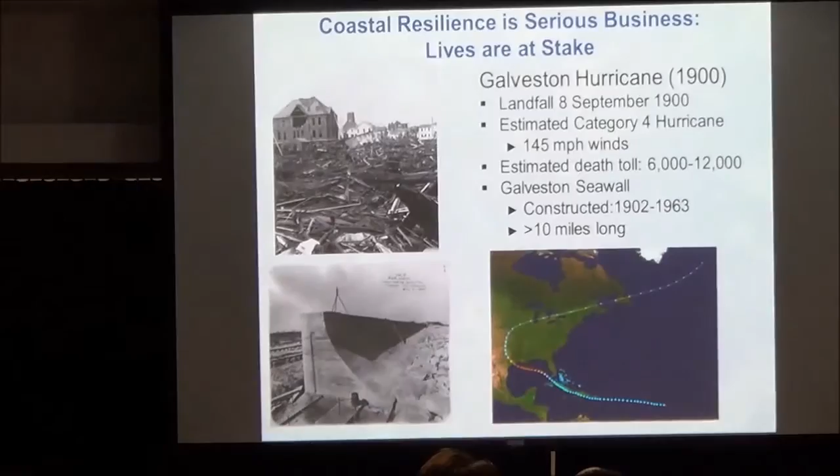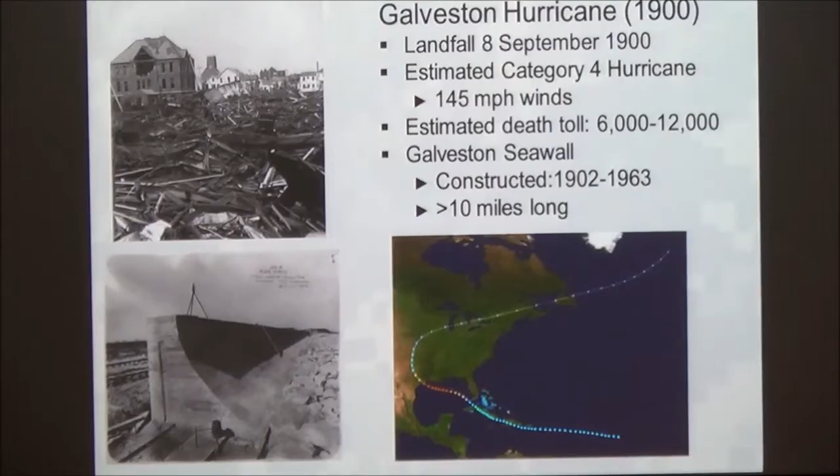I'm also a fan of history, and I'm going to use several examples that maybe don't particularly resonate so much with the Great Lakes setting, but hopefully we'll be able to draw some connections to analogs that do resonate with you. I was using this particular example recently in a series of talks. I was in Australia and New Zealand last month speaking on these exact topics on the other side of the globe. The deadliest natural disaster in U.S. history was the hurricane of 1900, which devastated Galveston Island.

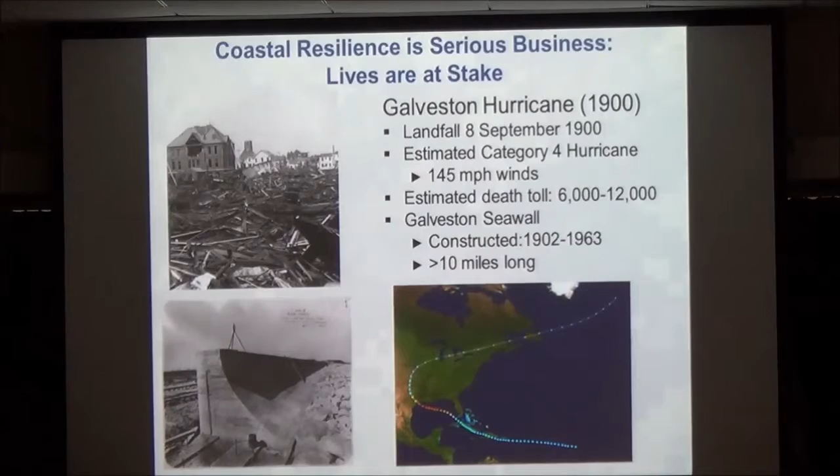The city of Galveston, in fact, at the time was one of 3 population centers in the state of Texas. It was equivalent in size, about 40,000 people roughly, to the city of Houston and the city of Dallas. They were all the same size. And arguably, Galveston was in fact a commercial center of the state of Texas because of the port. The port in Galveston dwarfed what existed in Houston at the time, in 1900. The surge was around 15 feet, it's estimated. The highest natural elevation on Galveston Island at the time, about 9 feet.

The best estimate for the number of deaths is 8,000 people died that day and the days following. So many dead, in fact, that a traditional burial was impossible, so funeral pyres burned on Galveston Island for weeks, day and night, as neighbors and family members burned their relations and friends after the event. That'll make an impression on a community.

And so after that event, a panel was commissioned. It was actually chaired by a former chief of engineers, Brigadier General Robert. And they came up with the Robert Plan, which included the construction of the Galveston seawall. At ASCE, it's on the Historic Registry of Engineered Features. If you've ever been there, it's quite an impressive structure. This 15 feet tall concrete structure. They built, in fact, the first 3 miles of this structure within just a couple of years' time. But then over about 60 years, constructed what now is in excess of 10 miles of seawall by this same design.

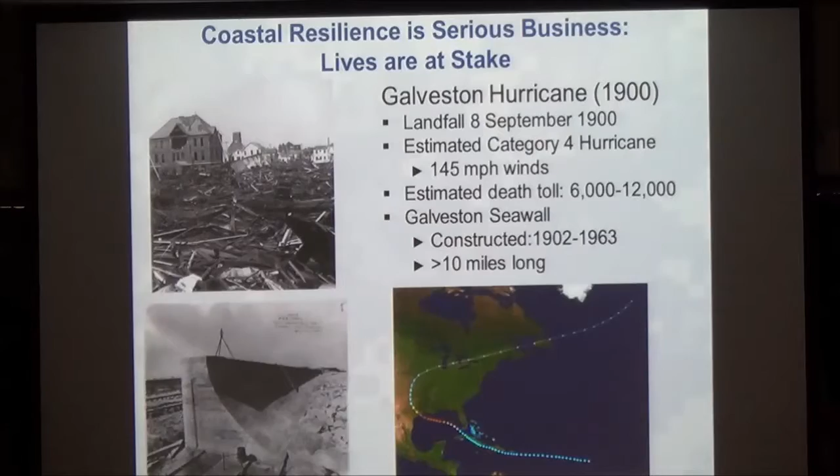So you build a structure like that seawall, and what do you do? You develop right behind it, right? So that hotel sits exactly 100 yards from the seawall itself. That particular hotel was constructed for the whopping sum of $1 million, which was a lot of money at that time. It's a very impressive place.

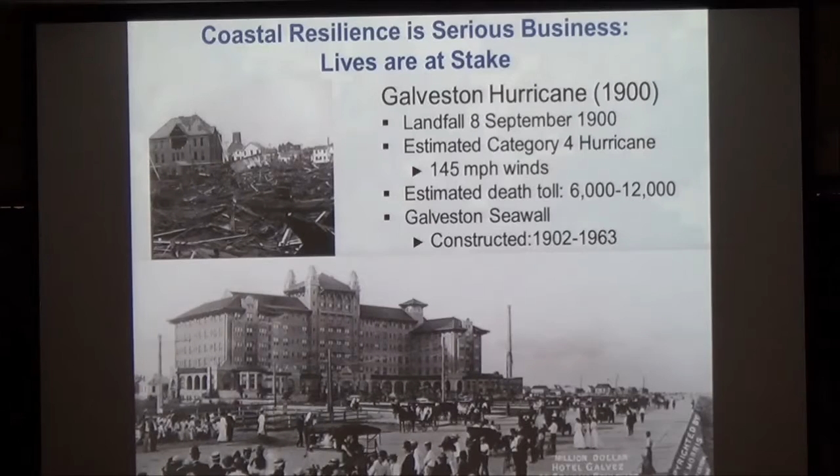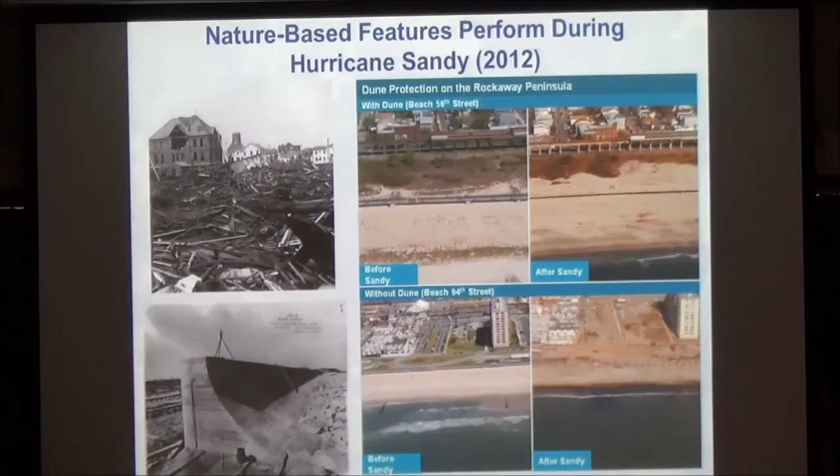Hurricane Sandy work that was mentioned. The North Atlantic Coast Comprehensive Study, what we call the NACCS affectionately, was a $20 million study the Corps was directed by Congress to conduct to evaluate opportunities to reduce coastal risk and enhance coastal resilience following Hurricane Sandy. The final report of the study was issued in January of this year.

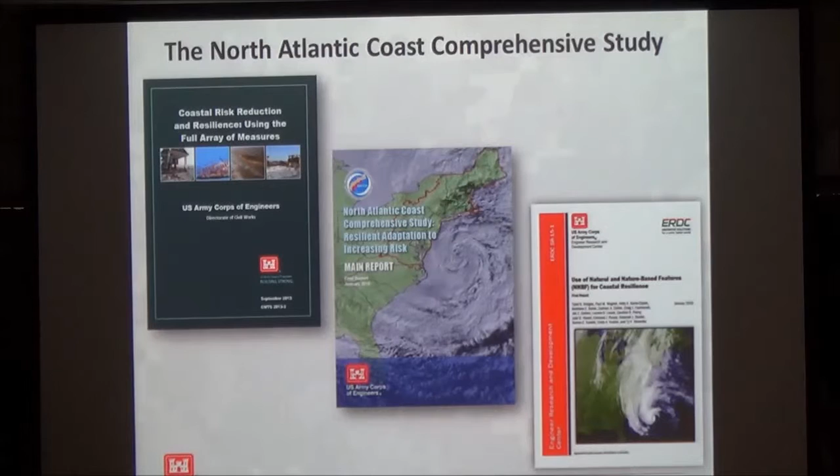There are some people who want to pit one against the other. I'm not sure that's such a useful way to proceed in discussion about this, but more how to integrate. I think the discussion this morning has been along those lines, right? How to integrate conventional infrastructure where it's needed with natural or nature-based approaches.

These are the kinds of features that are highlighted in these documents I've just shown you, including what was previously mentioned, very important: beach dune complexes are very important and underappreciated. We, in fact, at ERDC and USACE and USGS partnered with ASBPA just last week in a workshop out at Kitty Hawk, North Carolina, specifically focused on dunes.

Dune engineering, dune construction. Dunes, I think, are highly underappreciated in the United States for the value they provide, not just from an engineering perspective, but for the environmental and ecosystem values that dunes provide. And it's deserving of much more emphasis, and hopefully we'll build momentum from last week's workshop, which was originally designed for 50 people and went above 100 because of the interest.

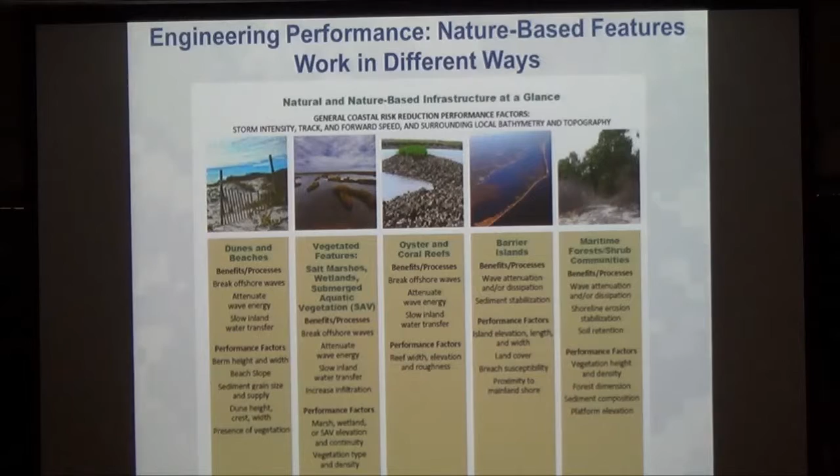But I think we all get the kinds of features. I will include, because it's been referenced already this morning, the importance of forests. Larger plants than the grasses that we might typically associate with these kinds of features. A forest can divert more surge and attenuate more waves than a typical grass species is going to. And there may be some places, certainly on the marine coast, where that's important and applicable.

This is just an excerpt from this document that gets to our statement of this integrated approach. There are going to be differences as to how much emphasis or weight can be placed on natural and nature-based versus conventional infrastructure. It's going to vary by context, of course, but our emphasis is on the integration, not the either-or.

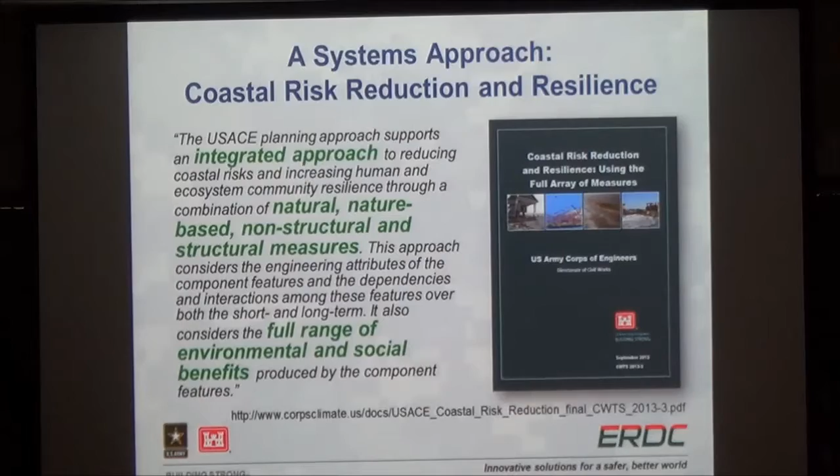And this is in the context of another word that's been used several times, I think, already this morning, this idea of resilience, which I guess is the buzzword du jour for the last few years. But I think there is real meaning there. It's not just a buzzword thing. But if you look at the literature, there are literally hundreds of definitions of resilience. They use it in electrical infrastructure. It's used everywhere. In ecology, certainly as well.

And we've been doing work within the Corps of Engineers to kind of define this meaning in some tangible form that's applicable to the things that we're doing. I don't want to go into this diagram too much, just to make a point that's already been emphasized through many of the examples, that the systems we're working with are dynamic.

And though we want to pursue concepts and intentions that we use words like stabilize, these are dynamic systems. And so the approaches I think that we need to use more and think about more is how we can build infrastructure, natural infrastructure, that is more harmonious, if you will, with the dynamism that's characteristic of this land-water interface that we're concerned with here.

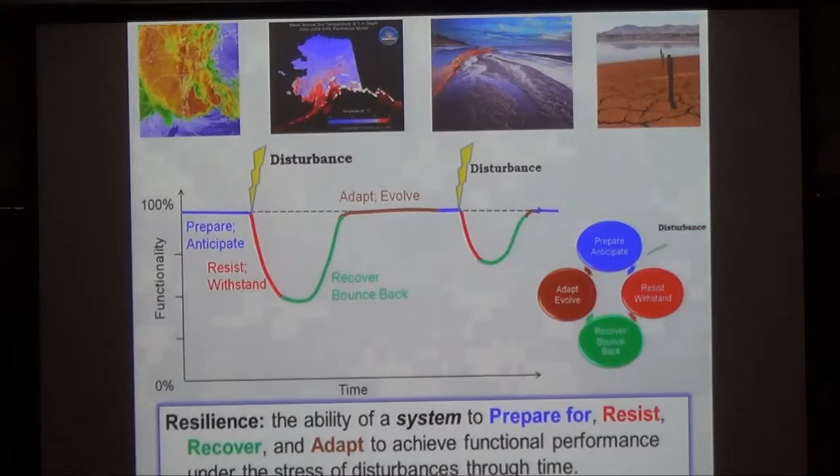So in this context of coastal resilience, this barrier island, the country in the world that has the most barrier islands, anybody want to hazard a guess? The United States of America. I know it's maybe not so applicable to the Great Lakes, but I think by last count we have 405 barrier islands in the United States, by far more than any other country on the planet.

But how do we use these kind of integrated approaches to produce better alignment, reduce risks? What range of services, including ecosystem services, is that a useful frame for us? I think it is, for considering how to pursue these kinds of opportunities. And then importantly, what are the science and engineering needs, gaps that need to be filled or addressed in some fashion with guidance to be able to promote these kinds of approaches?

These kind of figures are quite boring, but it was a useful device for us in developing the natural and nature-based features report that we produced for Sandy, to develop a framework of how to think about these opportunities. And in fact, many of the organizations that we solicited feedback from, including folks in the NGO community and sister agencies and government, gave us a lot of positive feedback on just helping to frame the thought process of how you identify, evaluate, and then pursue through transition implementation of these options.

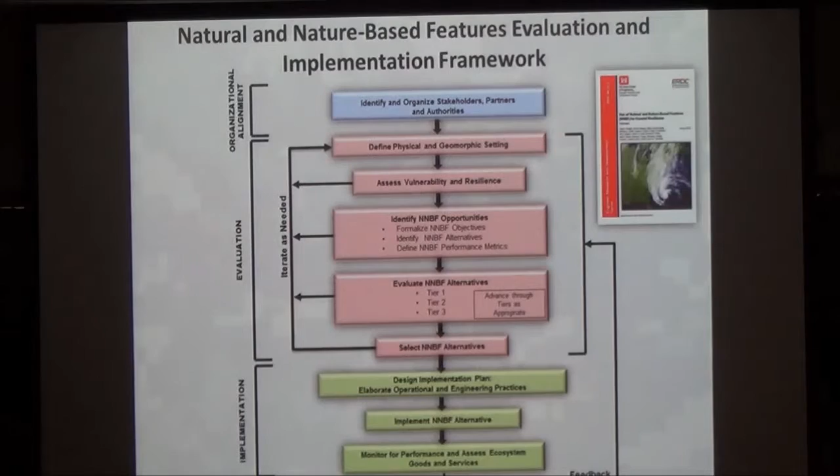So one source of advice I would give in context here is don't cut past this somewhat boring step, because it's useful in organizing your energies and putting them where it needs to be.

And I think now is a very useful time to pursue these kinds of opportunities because there are a lot of stars aligned. A lot of people are paying attention to natural infrastructure, i.e., a 100,000 person corporation called Caterpillar, and they're not the only ones thinking about this.

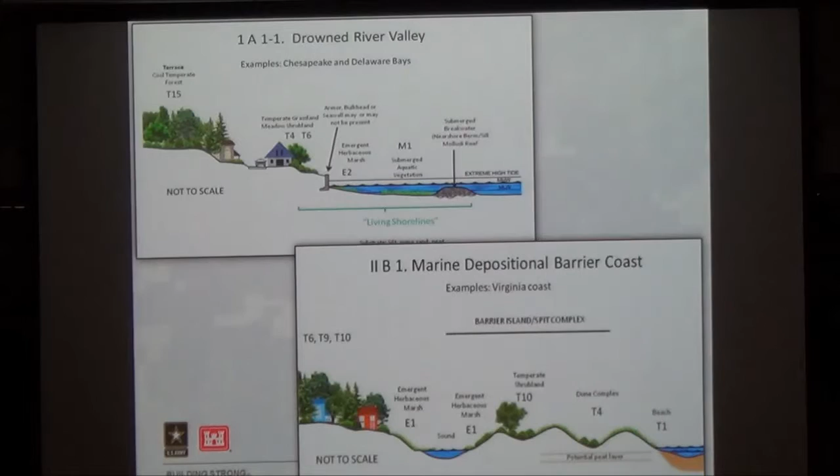This point has already been made, so I won't spend much time here, but we spend a lot of time talking about different physical contexts. Geomorphology matters, and what is going to work in one context is not necessarily going to work in another context. So definitely there's no one-size-fits-all silver bullet, pick your metaphor, for these kinds of approaches. And it has to be based, as was emphasized this morning, on the right processes, and processes that will support and sustain the solution over time.

We did spend some time thinking about how you'd go about evaluating from an engineering perspective these integrated approaches, and this slide just makes two simple points, that we envision needing a kind of a tiered approach for these kinds of evaluations.

If you've got to deploy the supercomputer every time you want to put one of these kinds of projects in place, you're not going to construct many projects, right? So thinking about how to do this in a tiered fashion that will facilitate the planning and the permitting and the engineering design, I think is a useful thing to think about as you move forward with guidance or a

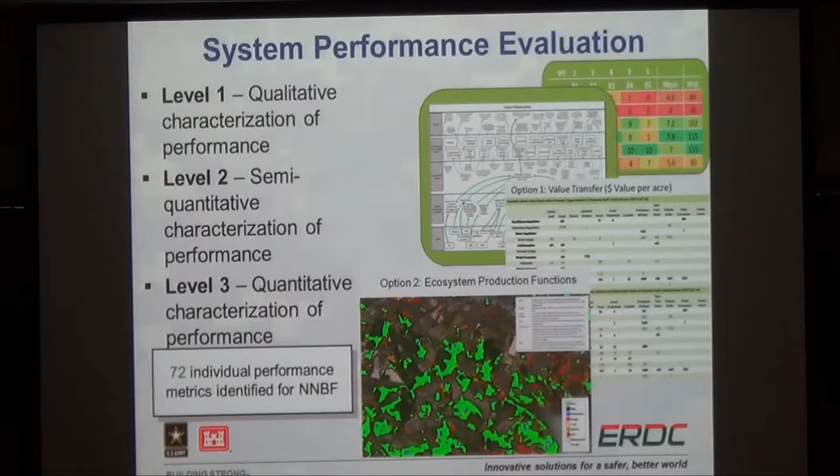plan of attack. I also mentioned that we took in our report an ecosystem services-based concept for how to evaluate the performance of these systems. We, as was I think articulated several times this morning, have multiple objectives we're trying to achieve with these kinds of approaches, right? Engineering performance is very important, but there are other services we'd like to derive from these systems as well, from the social as well as the environmental point of view. And we spent some time talking about tools and identifying some case studies.

Sediment is a resource, very well emphasized in the previous talk. We have a lot of sediment out there, for example, in our navigation program in the Corps of Engineers. And this is an example where we're using optimization tools, in this case in Central Long Island Sound, to inform a stakeholder process where they were trying to identify new ways in which they could be using sediments as opposed to the old, store it and forget about it methods of the past.

I think that's relevant in the lakes. A lot of history of using confined disposal facilities in the Great Lakes. Back in the 70s and maybe the 80s, where there was such a huge problem with contaminated material, that made a lot of sense. I think while there are places where that's still an issue, it is much less an issue than it was at the time. Removing sediment from the water, all else being equal, is a bad idea.

And that's one of my rules of thumb. Sediment should be managed in water unless there's a credible and substantial reason to do otherwise. I guess you can quote me on it, but I've quoted it enough to others.

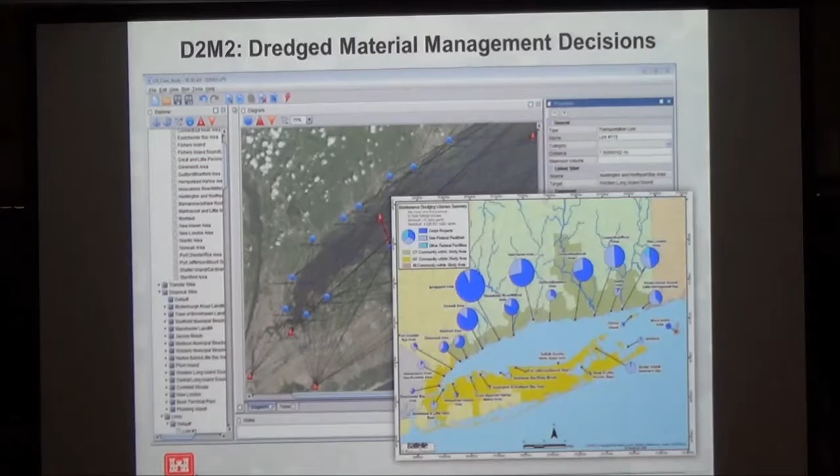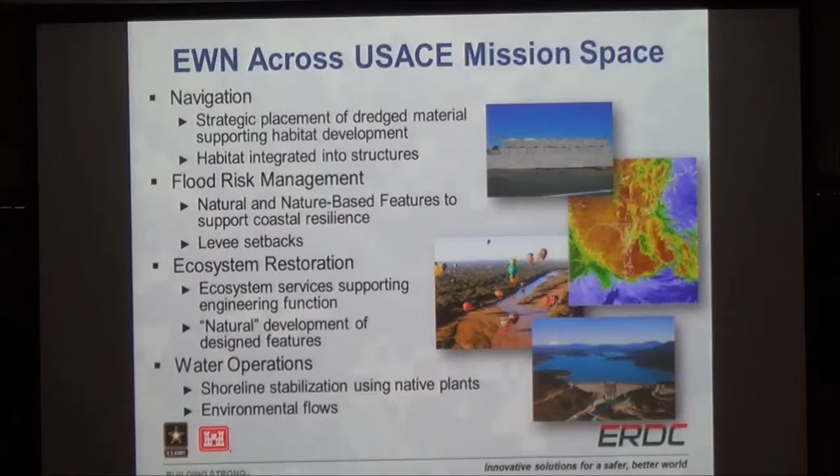It applies across our programs within the Corps. These are just some examples. We started in the context of navigation, have a lot of sediment examples, but there are other contexts for us as well, like water operations and flood risk management, ecosystem restoration, and some brief examples that illustrate the types of approaches that are worthwhile. We've been at this since 2010 when we started this program, which I've been leading within the Corps with a lot of help and support and a broad team across the Corps of Engineers.

We put a lot of emphasis on the social dynamics, referenced this morning as well. You've got to get people together to think about these opportunities in events just like this. This is how I think we've been able to make progress in the program. You get people together to think, create, imagine how they could do things differently, and that's the key to making progress.

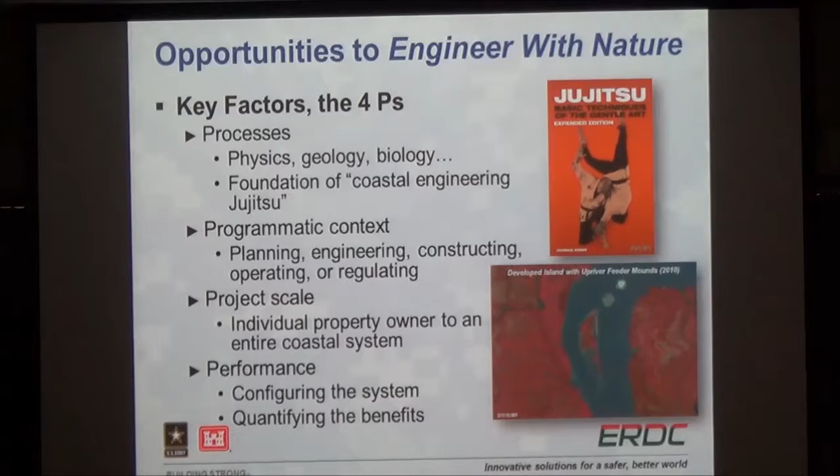There are different contexts for pursuing these kinds of projects. In a conversation a few years ago, I was trying to create some metaphors for some of my coastal engineering colleagues, and I said, this is like coastal engineering jujitsu. Right? That is, we're trying to use our opponents', if you want to think of natural forces as our opponents, energy and force and power to our benefit. How can we do that? And with regard to sediment processes, that point was made multiple times this morning. I won't go into this too much. Get to some specific examples.

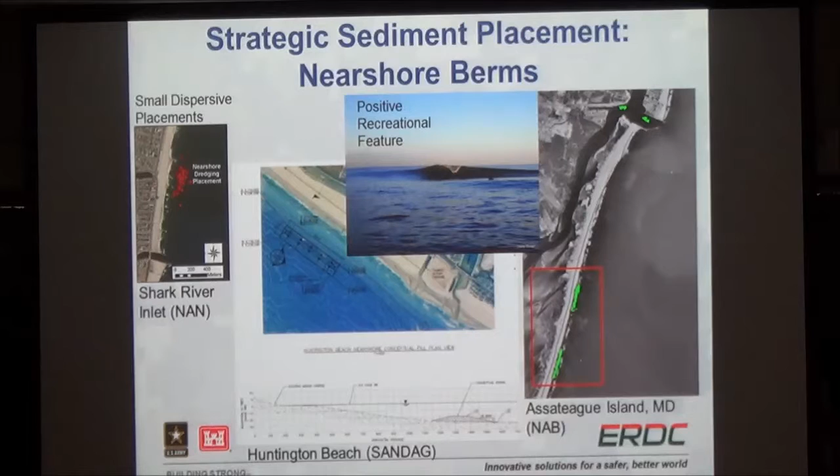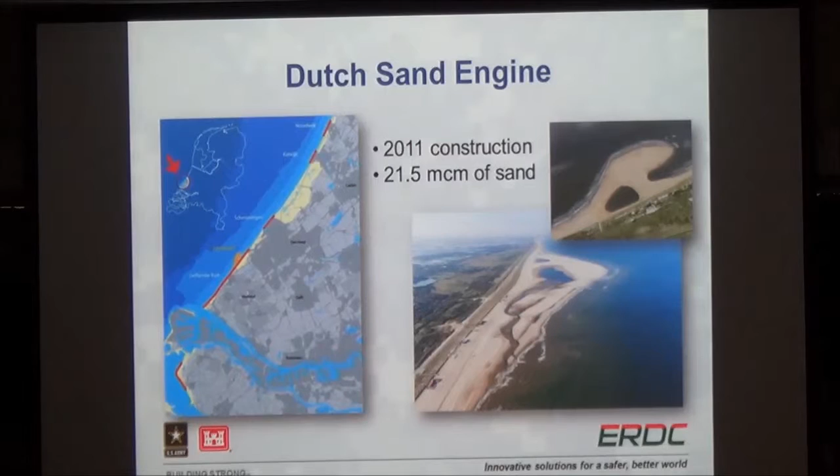An extensive amount of monitoring they're conducting, interested in identifying the kind of economy of scale and the savings that they're gaining from this one-time large investment in beach nourishment as opposed to the incremental approach to doing it. Very interesting experiment. The jury's still out on this as they collect data relevant to this project. This is an example of engineering with nature to support ecosystems as well as engineering.

I don't even know what time I started here, but you'll give me the hook.

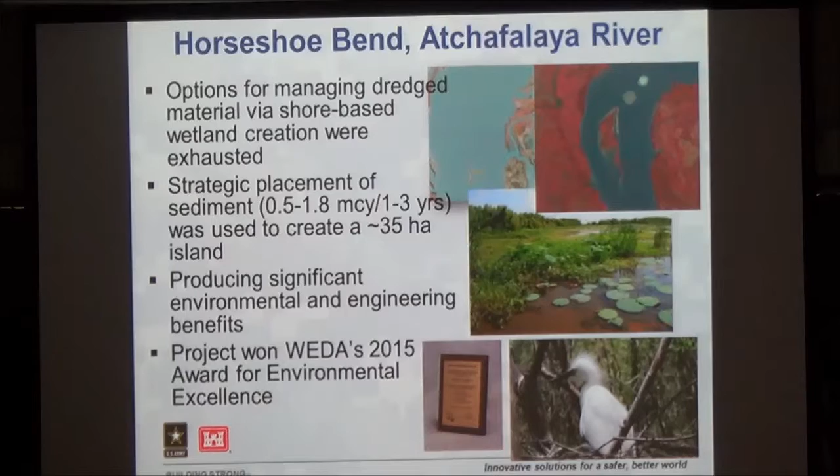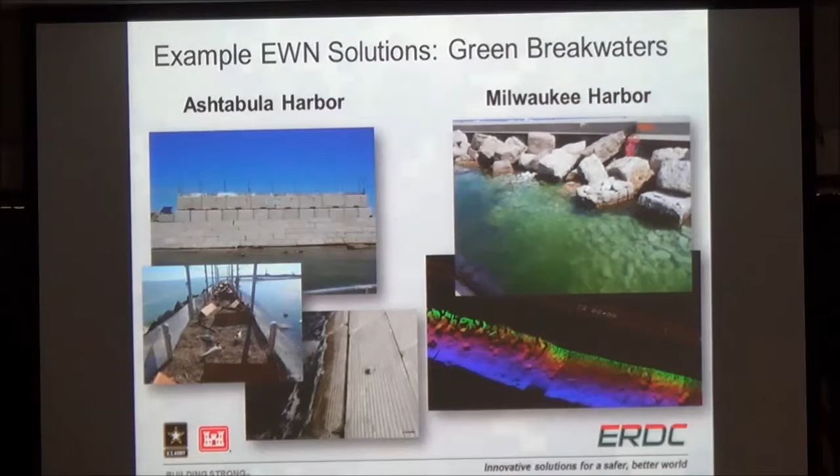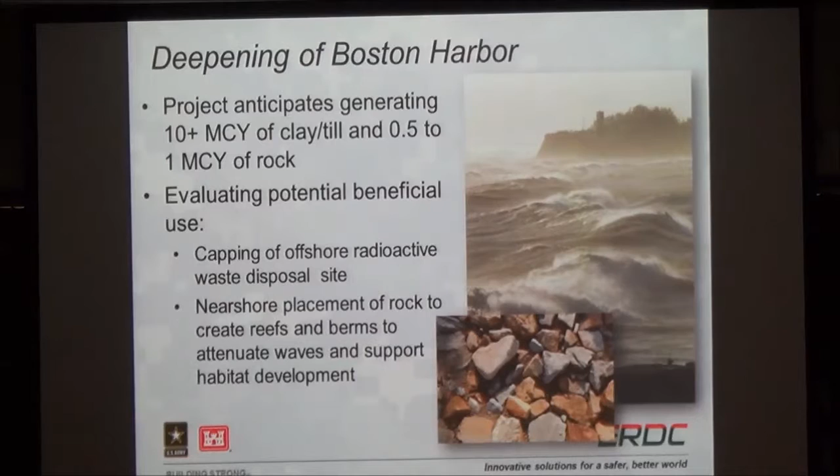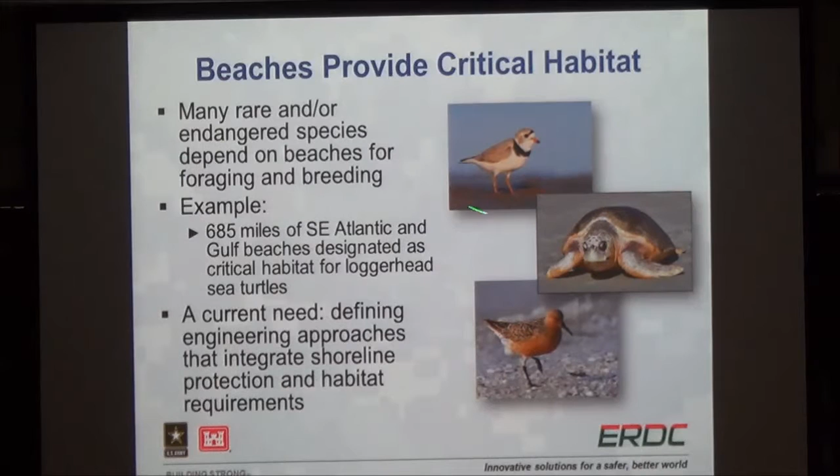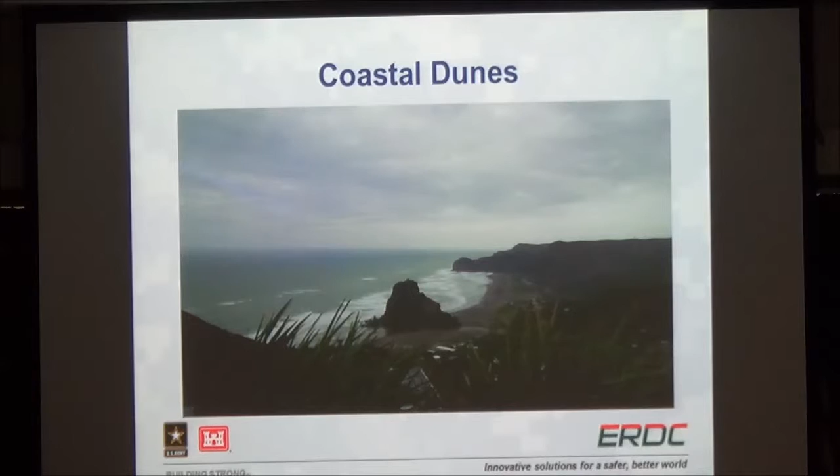I mentioned I was in Australia and New Zealand last month, and this is a picture of one of these projects. I toured several coastal projects when I was in New Zealand. This is a place called Piha, which is on the western coast of New Zealand. You go 1,000 miles this way and you hit Australia. That's a black sand beach, and beautiful area, but they've had some issues and are trying to address those issues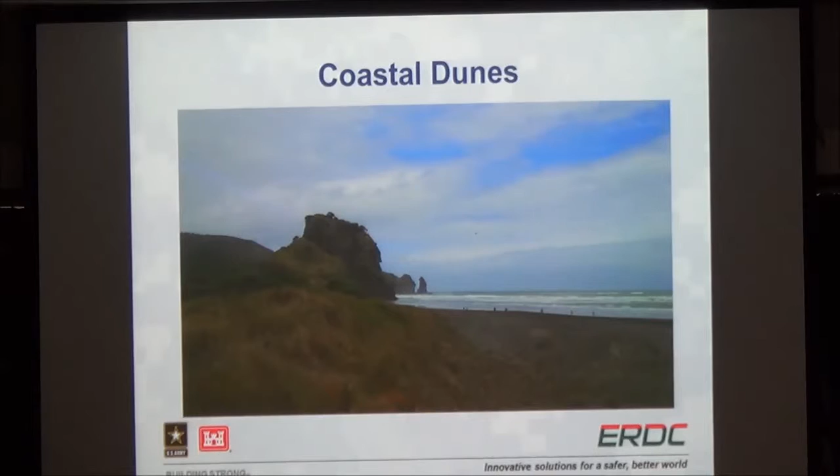with natural infrastructure. In this particular case, this dune here is a constructed engineered dune, which they vegetated. And if you went about 100 yards this way, we've got people living in houses. So you've got this constructed dune. The community is really engaged in maintaining that feature over time.

Regulatory context. This project in Tampa Bay, this island is owned by the Audubon Society, and they came to the Corps with a permit request. They wanted to put in, in this case, these reef ball structures, right? These hollow concrete form structures that provide habitat but also can attenuate waves.

So the Jacksonville District was the permitting authority in this particular case. It was 930 feet of offshore, we would say, maybe near shore, using the terms earlier, to attenuate waves, because this island that Audubon owned was essentially dissolving away, and they wanted to maintain this habitat.

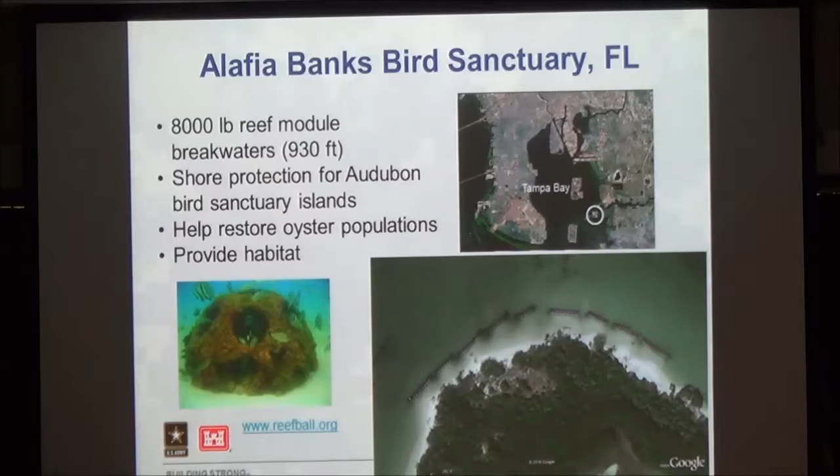I mentioned the social aspects. We actually have 3 districts now, but 2 of our first districts that are Engineering With Nature proving grounds, one of them is Buffalo. And I'm very proud of Buffalo District myself because of the energy with which they are pursuing these kinds of opportunities since becoming one of the Engineering With Nature proving grounds in the last year, a whole portfolio of projects where they're pursuing these kinds of opportunities.

And I would invite you to engage, Tony's here and others, to find ways in which we can pursue these. And we've kicked these all off with events like this to stimulate ideas on how to implement these kinds of practices across the entire portfolio of the district's programs. Galveston is the other. The 3rd district that's just come online now is Philadelphia District.

These are some examples. Demonstration projects are very important, and we've been working with Philadelphia District with the state of New Jersey, helping the state of New Jersey accept these modifications and practices. This gets to my question earlier about regulatory hurdles, if you will. To use thin layer placement of sediments to raise elevation for sinking wetlands. Another case where we're working with the Nature Conservancy on a project doing just this.

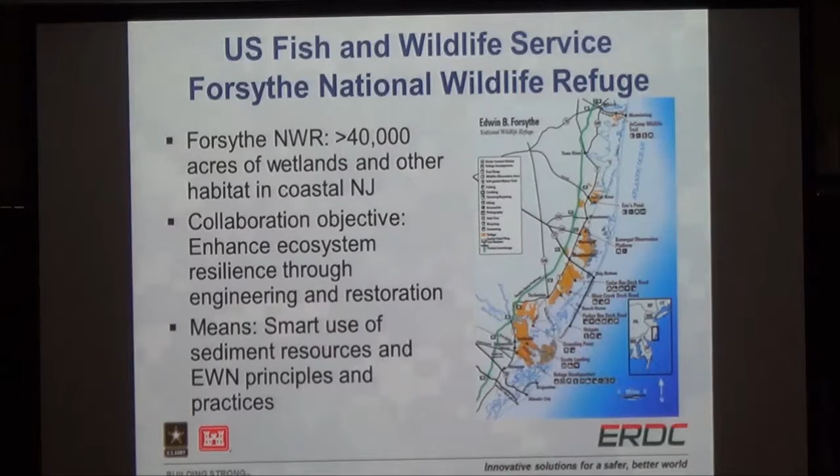And working with the Fish and Wildlife Service at one of their wildlife refuges where they have a variety of conditions at their wetlands, some of them sinking and degraded for a variety of reasons, and they want to use sediments from the navigation program to do this, but the Fish and Wildlife Service doesn't employ a lot of engineers, not surprisingly. So how to do this is their question. So we have an interagency agreement with them to help support them in that.

Soon to come online, we're putting a bunch of resources together that describe thin layer placement of sediment. What we mean by that is using engineering to place centimeter lifts of sediment as opposed to meter lifts. Anybody can build a pile meters high of sediment, right? But it's a little bit different when you're just trying to build centimeters of lift. And so there are a lot of projects that meet this condition, and what we're bringing together is basically an electronic library of reports and descriptions of practice that can be used to accomplish that.

I'm not going to go into this at all. It's just included for completeness. We have put together a lot of demonstration projects, which again I think are very key. We need to give ourselves license or permission to pursue these modifications of practice and these innovations so we can learn from that.

It's kind of hard to convince everybody based on theory and modeling studies, but if you could actually do it on the ground and collect data to show that you did it, right, you probably have a compelling case to persuade somebody. And we have these projects all around the country, a limited set of them.

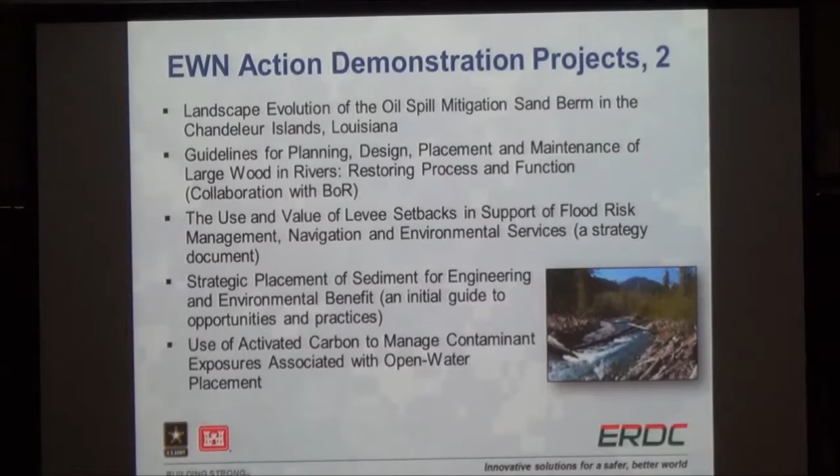One I'd point out that resonated with comments earlier is we made an investment in developing an actual engineering guide on the use of large wood in restoration. This is something that we did with the Bureau of Reclamation, so the Corps of Engineers and BOR, and this document is like a couple of weeks from being on the street, and it might be of interest to you all given the discussions this morning.

How can integrated systems be assembled to reduce long-term O&M for seawalls, for example? If we don't have a beach now, but we only have a seawall, would putting a beach in front of that seawall reduce the O&M for that seawall or extend the life of that seawall? Then maybe it would be justifiable to consider putting a beach someplace that you don't have one now. And how can field-scale demonstration projects be used to accelerate progress?

We need to recognize that we're engaging in some innovation, and there are some risks and uncertainties that are attendant to taking more innovative practices, so you have to manage that. There's a lot of value, I think, in making investments and trying to elevate communication about advancing practice, and events like this are one way of doing that. We've got to share with others what our intent is and what progress we're making if we actually want to make progress.